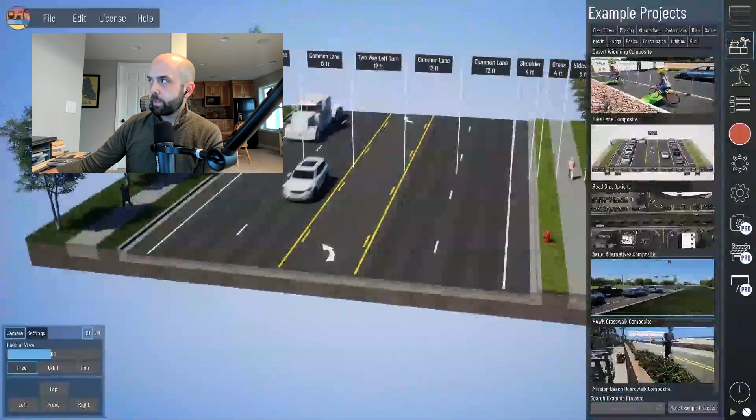Yeah, and we were just talking about imported assets, but being able to actually capture the scenery around that road - we're dealing with photorealistic representations of a roadway, so let's make sure the whole thing is photorealistic. Being able to import static imagery and layer it either behind or in front of your model makes it look more realistic. Now you don't need to model the 3D buildings on that corridor or get the vegetation into the background - you can actually just take a static image.

I'm sharing my screen here. You can see I'm rotating the camera model, but out there in the background is just a static image of a street. So what that photo compositing tool lets you do as a user is basically rebuild the roadway so that you can line up your camera in the model to where that person took that picture. We have some tools in here to let you do that, but that's kind of a one-time workflow where I can line that camera up to match that existing corridor. We even have some tools here to help with things like camera angles and positions.

Left, right, up, down positions like that. But once you get that, you can save that camera position. It's a one-time thing per project, and then at any time I can come back and revert to that saved camera position.

Yes, we actually have an example project built in here that's pretty well detailed, and this is something I built. We were looking for something with bridges and construction staging to include as an example project in the software to help users get familiar with what you can do with it. This is pretty detailed, it's got 13 different models, and it walks through the original bridge all the way to a final full bridge reconstruction.

Then using that construction staging, those capabilities, things like area highlights where you can show the lanes that are going to get demoed soon, or pathway arrows to call attention to lanes that would remain open during construction, temporary barriers and things like that.

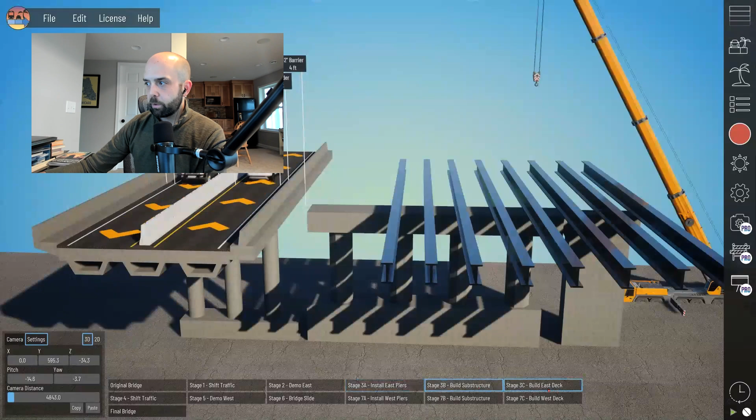This whole project, building new bridges from the ground up, is probably one of the longest workflows I've done for these example projects—about 5 or 6 hours of modeling. When we tell BIM specialists that, they're blown away by how quickly something this detailed can be put together and ready for public consumption. It's very cool.

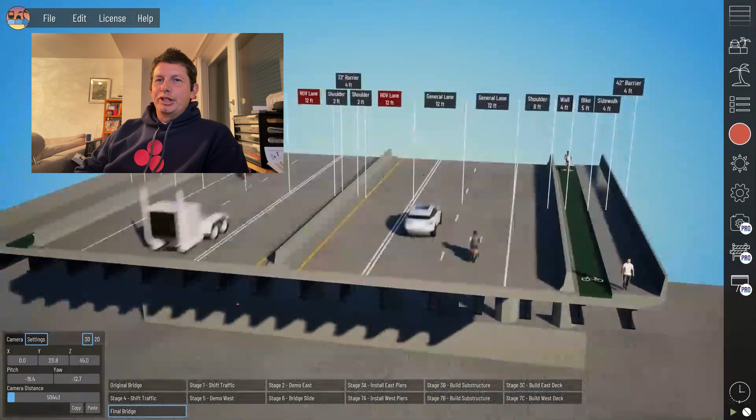I had a really good look through some of those example files, and it opens your mind up—it's not just that straight road, you can start doing so much more with it. That underground service work example is another great one. It's something I never considered until you start playing with those examples, showing a service installation through a road and how you stage that through a live section of road.

This project was one I drew on something I actually designed and worked on in Illinois—a very similar roadway, a similar improvement, in a small downtown where they needed to reconstruct the water main. There was concern from the people who worked in that corridor, the business owners contributing money and funding for the roadway reconstruction, about how construction would affect their business during the construction season.

So while it wasn't exactly this, it was still a scenario where construction staging is something we need to talk about in the earlier stages of design, and be able to communicate as design engineers, saying: this is where things have to go, we have limited space, what are we going to do with that limited space?

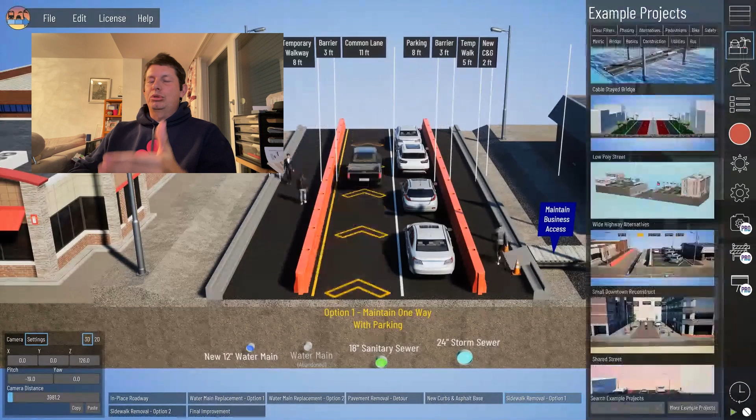And I think of the amount of meetings, even with community residents, on the liaison side of things, where having a video file showing how something's physically going to look outside their house or on their road—showing barriers, that you're still going to have parking access, all these kinds of things—you can say a million things to people, but it's very hard for them to believe and see without actually seeing it.

Being able to have a tool that's a scaled model—not an exact snip of a road, but with scaled lanes based on certain widths—you're clearly demonstrating what you're going to be doing outside their business, for example. A picture says 1,000 words at the end of the day. It really does make a difference.

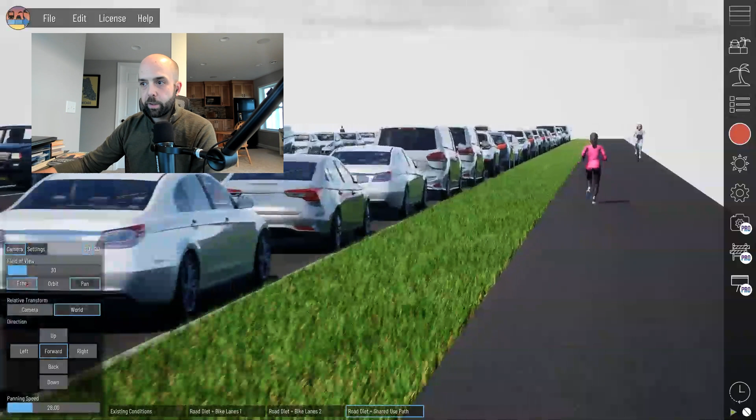I just pulled up another example of what I was talking about earlier, being in this 3D space. We can now start looking at this roadway from different users' points of view. I stretched this example out 1,000 feet, but capturing what it's like to be a certain user of a roadway can help communicate those trade-offs and evaluate what's most ideal for the users. It's a great way to identify deficiencies with the design or find opportunities.

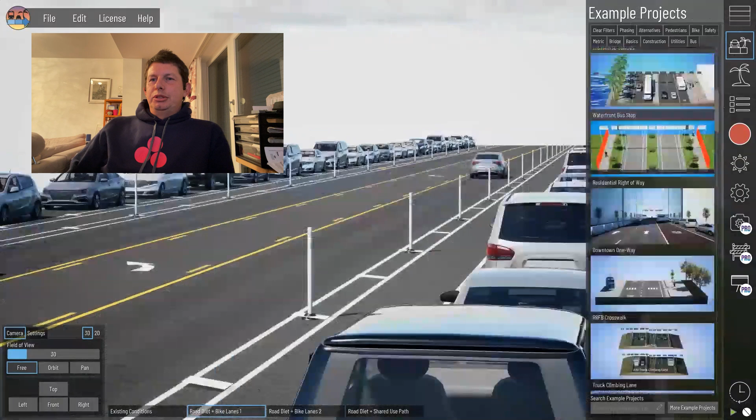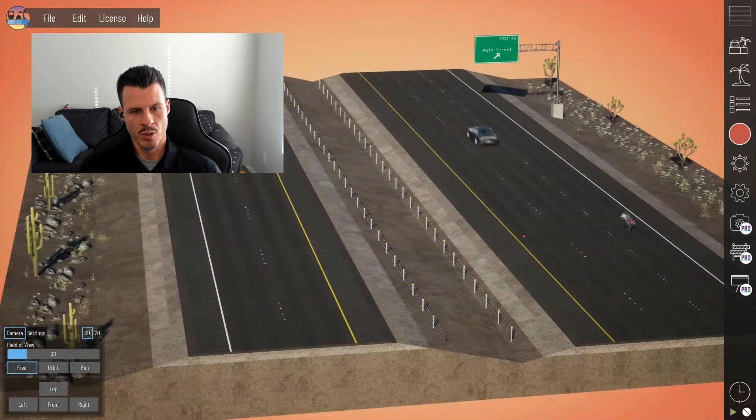I suppose the next thing we're intrigued about is, what does the future look like for you guys? You're rolling into version 3, that's the next release, is it? Yeah, we're on 2.5 right now, and we're working on version 3, hoping to get that out in Q1 or Q2 of 2024.

As I mentioned before, we have requests for other things beyond this, like beyond intersections, that we would love to get out someday. But for version 3, I'll give a few highlights of what's going to be different.

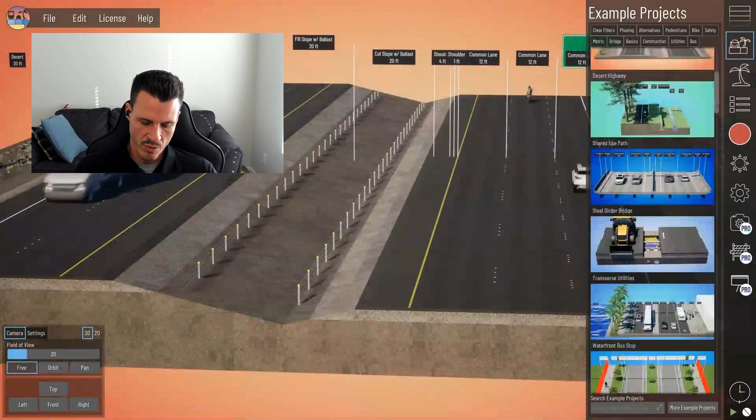One is dynamic assets, so assets that you can place and customize. For example, an arrow board where you can move traffic using arrows, and a custom message sign where you can change the words on it, like construction ahead, something like that. Also customizable bus, customizable train, change the color on assets, more realistic people, including different poses for them.

The most fundamental thing that's going to be different about version 3 is custom sections. Right now we have over 100 sections that you can drag and drop into the model, but once they're in there, you can't change the width or fundamental qualities of that section. With the custom section creator, you'll be able to either edit the sections we have, or create new ones from scratch. That's really important if you have, for example, a curb that's unique to your geography, you'll be able to build that and put it in there.

Once we have the custom section creator, in future versions, hopefully 3.5 or whatever, we want to start doing things like curvature. In roadway design, we talk about horizontal and vertical curvature, so that's going to be the next evolution of Beyond Typicals. We'll be able to make it so we can start doing curved roads, and then hopefully things like road tapers, first with the geometry and then with the traffic, making road merging.

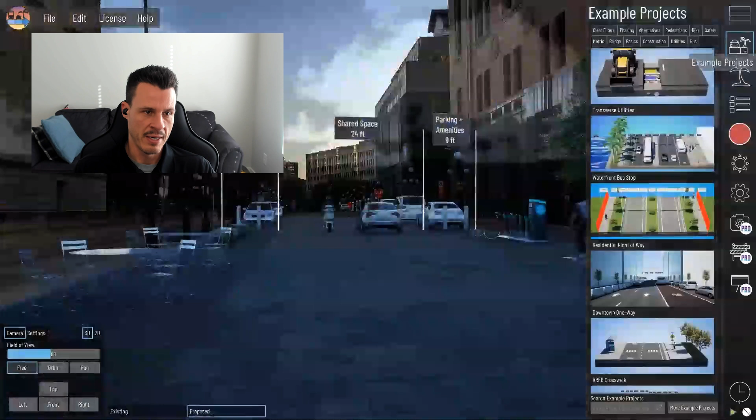So that's our approach to development: listen as much as possible to our customers, be slow, organic and deliberate in our development, and push these in a way that our customers see we're committed to making this better and better over the long term.

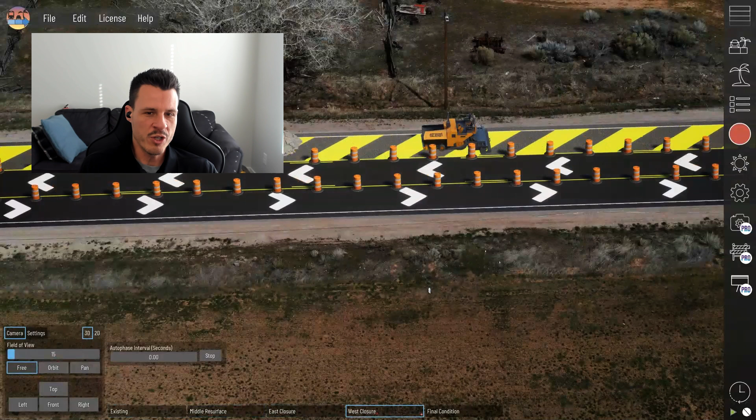Beyond Typicals is built on Unreal Engine, which is a gaming engine. If you have kids, or maybe anyone listening to this plays Fortnite, Rocket League, or Fall Guys, those are all built on Unreal Engine. So what you're seeing on the screen from Brian, that's essentially a video game, and you need a good graphics card to run it. Most of our customers have been able to do that, most CAD or BIM machines will be able to run it, but there are still limitations.

To get this out to the most users possible, we knew that making a cloud version was going to be important. By cloud, I mean it's completely browser based - you don't have to download or install anything. We just released this a few months ago. If you buy a license, you can add it on for a little bit extra. Once you have that, you click on the link and it will load up a virtual version of Beyond Typicals. It's the exact same version, 2.5, just like the desktop. It's just running on a virtual graphics card somewhere else - it's a cloud GPU - and you can work in the browser.

You can edit your project and save it. When you save it, it downloads. If you created and downloaded a file from the cloud version, you could open it in the desktop - it's the exact same thing. You're just basically renting a cloud computer from us to use the software. This is very important for customers looking to expand to more and more users but who can't go out and buy that many computers. Now they can just buy the cloud version and distribute it to as many users as they need.

Very, very cool. It really does just open that up to everyone else. My laptop is starting to get a little bit dated, so I was a little hesitant to try the desktop version, but I was playing with the cloud-based one, and no issues whatsoever. I think it's a really good offering to open it up to that bigger market.